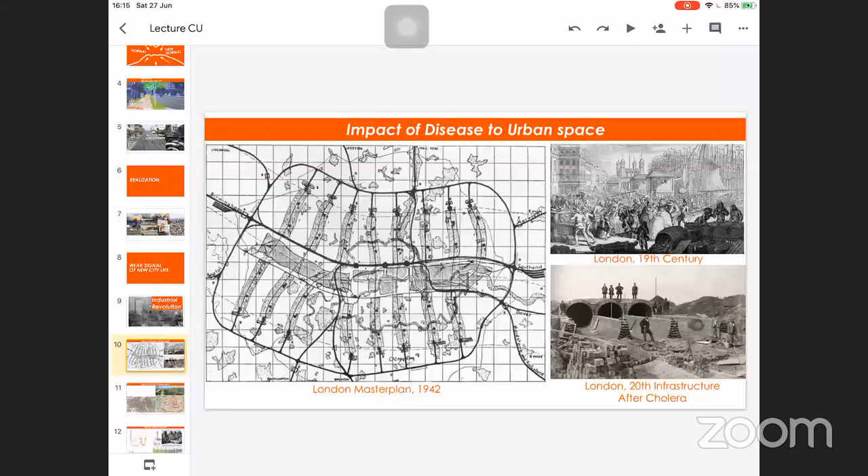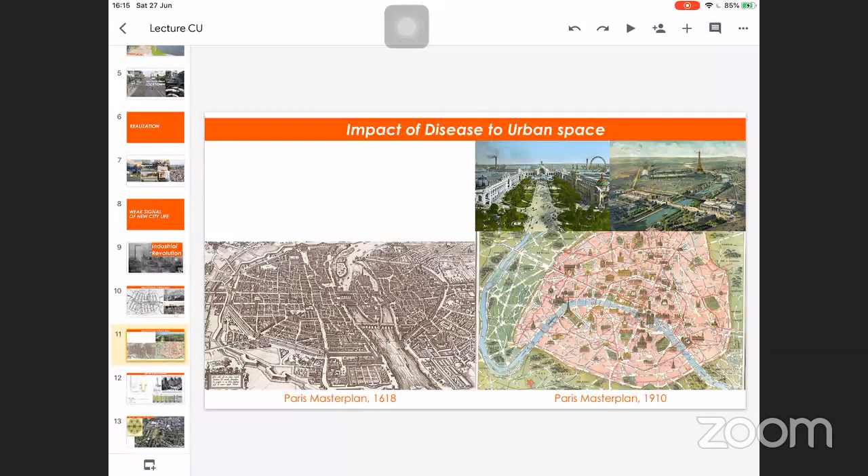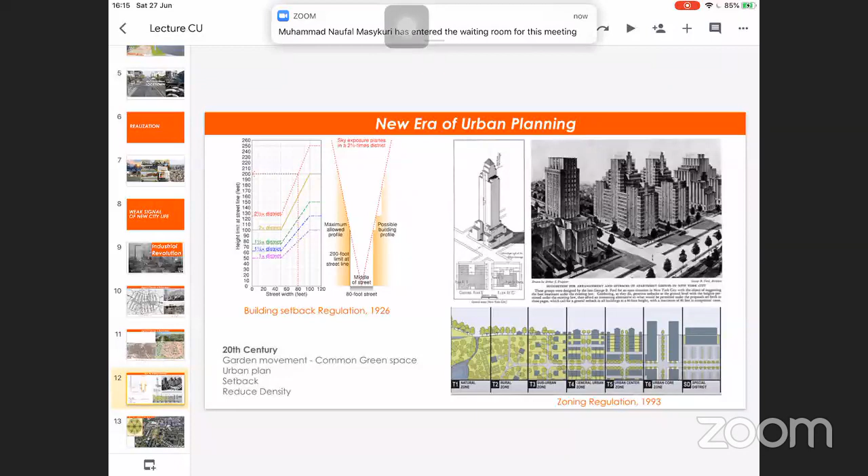So that public infrastructure became the tools to make people live better in the city. Even in France, in Paris, when the city became very condensed, they started to create parks around the city to make sure the living environment was better. Or even in the US, in New York, they started to look into setbacks to make sure ventilation got better in this kind of environment. People also started to look into the possibility of living in the garden, having this idea that they can live outside the city.

In the modern era, we started to look into the possibilities of living within the garden, or garden city, like in Singapore. So I think the relationship between the city and the well-being of the people is kind of related.

For example, right now we are facing a lot of air pollution and people getting sick from living in the urban area, and we are lacking green space. For example, we have very little green space in Bangkok, relating also to safety in the city and mental health. A lot of studies have confirmed that actually public space or green spaces can play an important role in creating better well-being for the people.

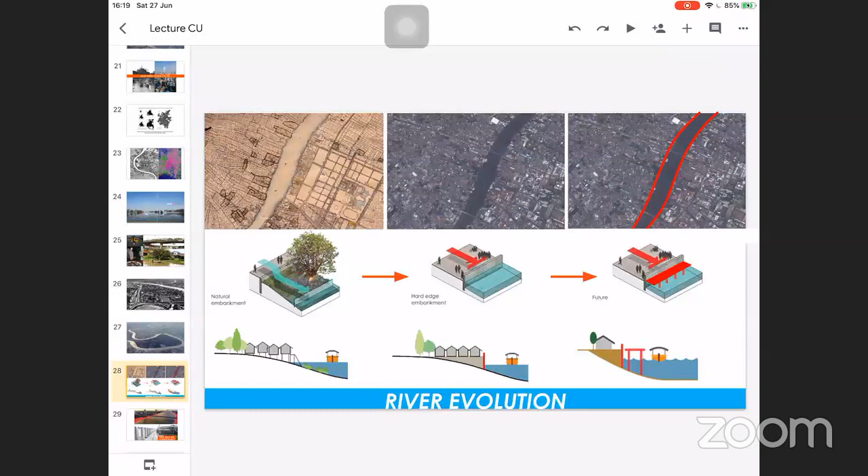If you're looking at this map, it's very clear that people started to reclaim the peripheral area or riparian area along the river. Because of the flood, the intervention was a concrete wall to prevent the flood from flooding the city. So I think the more we develop the city, the more nature will be replaced.

Of course, replacing the public space with this concrete structure might not be the real answer to that, because it affects people and affects the way of life of the community. So I think we need to look into what would be the inclusive role of public space that can think and be concerned not only for the people, but also for the natural environment at the same time.

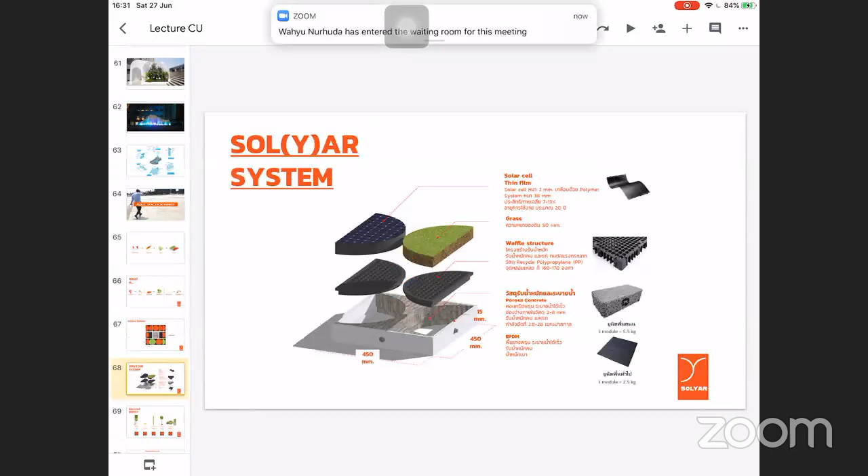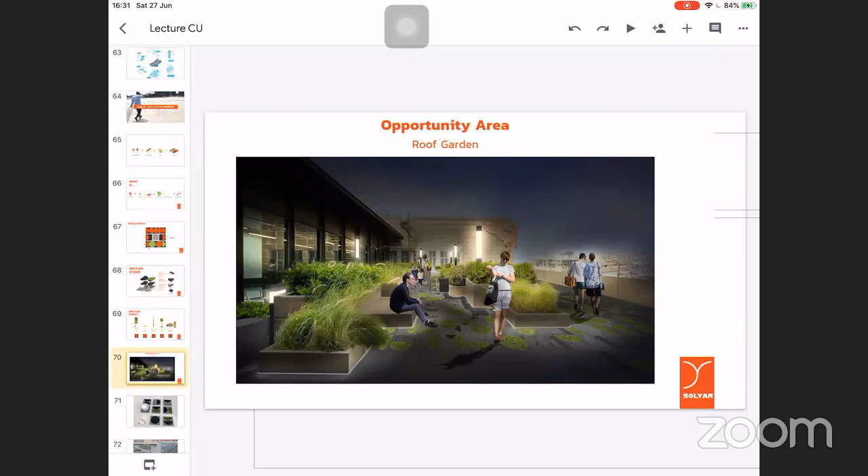So we're developing this pavement that combines solar cells and greenery, becoming a new tool to turn the heat space, or hard surface, into an energy space that can benefit people for enjoyment and also turn into energy during the night.

We got a grant from the government and we are developing the one-to-one prototype right now, and it's going to be implemented within the next two months.

Another possibility for public space is green infrastructure. I think flooding is one of the environmental challenges we face, so the role of green space or parks can also be part of the solution in absorbing the seasonal flood during the rainy season.

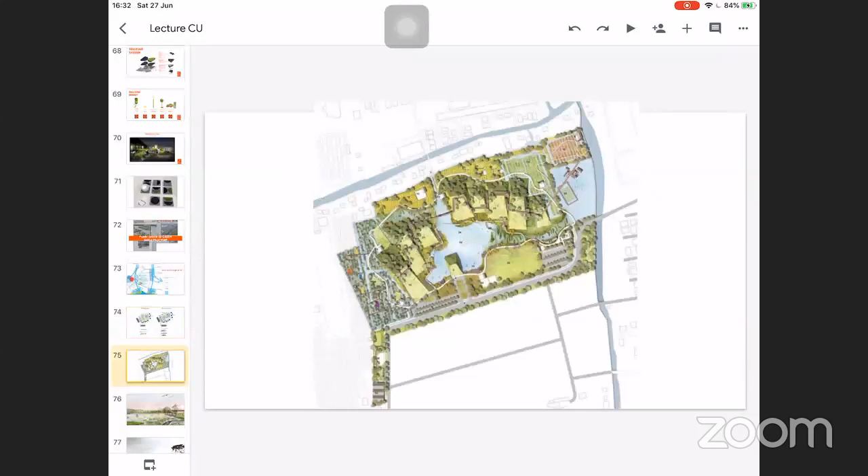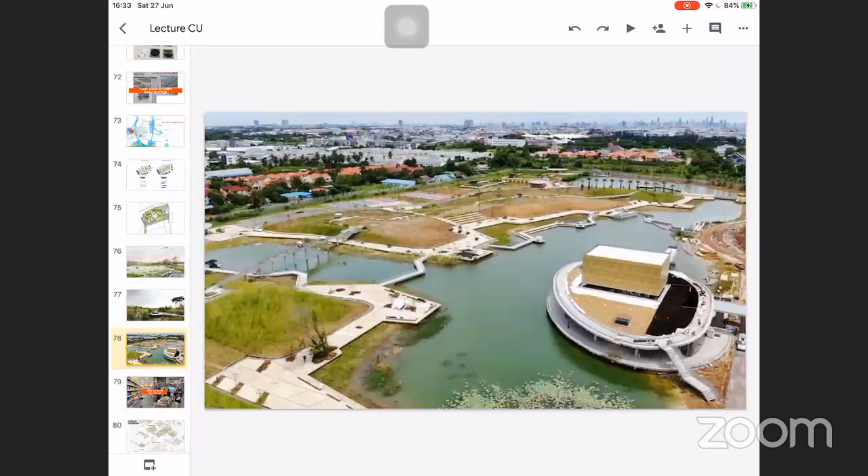So we designed this park outside Bangkok city, which can receive the flood from the north. It becomes a water detention area that can save the neighborhood from flooding, and it also turns the public land into more functional, educational, ecological park for people to enjoy at the same time. It's under construction right now, and hopefully by the end of this year it will be completed.

Another topic is about food security. I think during the pandemic, it's shown how vulnerable or fragile urban dwellers living in the city are. We have to rely on food produced from the outside, from the countryside.

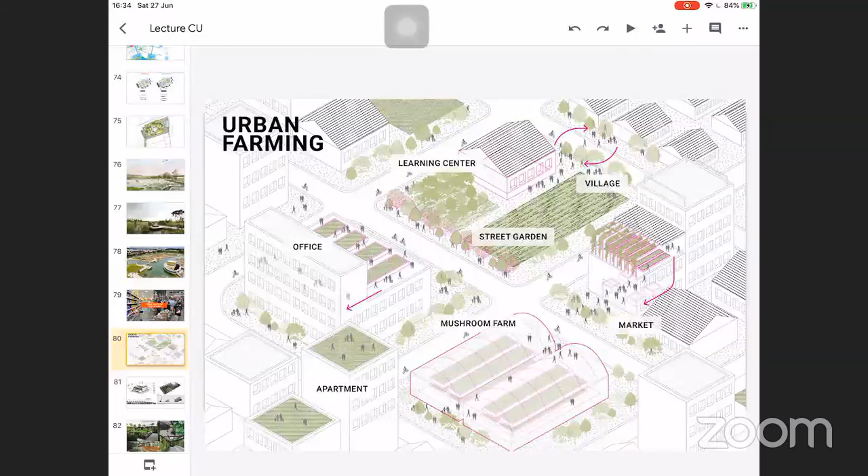I think right now people start to look into our own assets, either abandoned land in the city or rooftops, to see if they can be turned into urban farms, which can reduce this food security risk. This is one of our projects in Bangkok, turning the rooftop of an office building into urban farming.

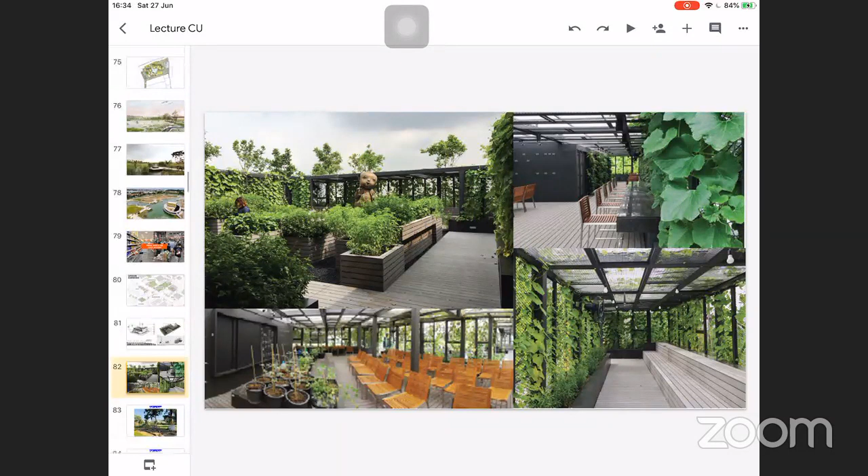It's composed of two zones. One is a workshop area, and another is for farming with benches to sit around, becoming like a roof garden that officers in the building can enjoy, while also inviting the public to come and learn how to develop their own urban farm.

During the pandemic, we've been surveying the possibilities of turning empty or abandoned parks in the city center into farms, and trying to convince the local government to turn this abandoned land into urban farming.

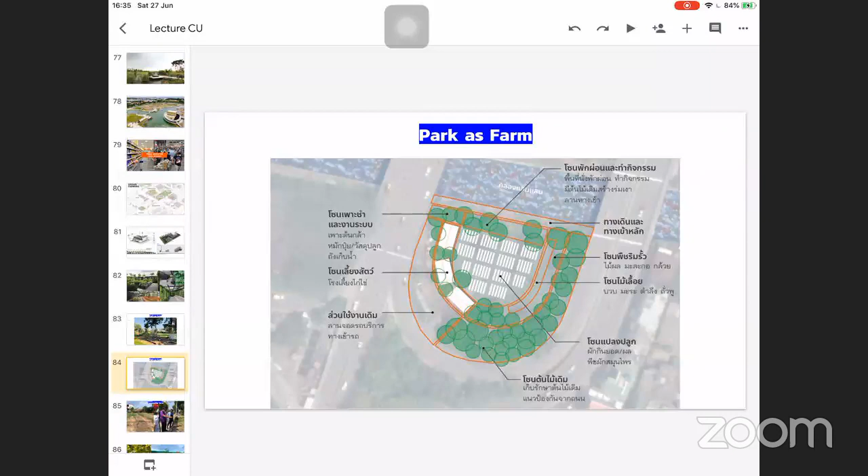I think before, we might have thought the park's role was just to provide activities for people. But during the pandemic, people started to rethink what the new role of the public park should be.

Not only in the park, but in the community too - this low-income community in the city center - we discovered the community themselves turned abandoned land into an urban farm where they could produce vegetables and herbs to feed community members.

Some communities turned a very limited space into a vegetable garden, or sometimes a mushroom farm, which not only feeds the community but also becomes a new product that creates job opportunities for them.

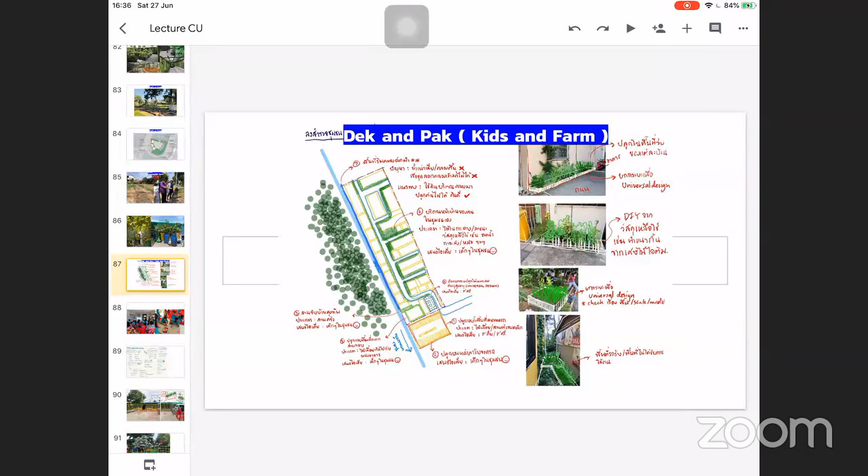After surveying, we discovered one community we would like to work with, because it still has potential for farming even with so little space. The community themselves tried to find areas, and we've been working with them for the past three weeks identifying spaces that could be turned into farms.

We worked with the kids in the community to identify what kind of vegetables they wanted to plant and how they would turn those plants into food. It's a learning process with the community and our staff, and we just finished the design - hopefully we'll implement it with them in the next couple of weeks.

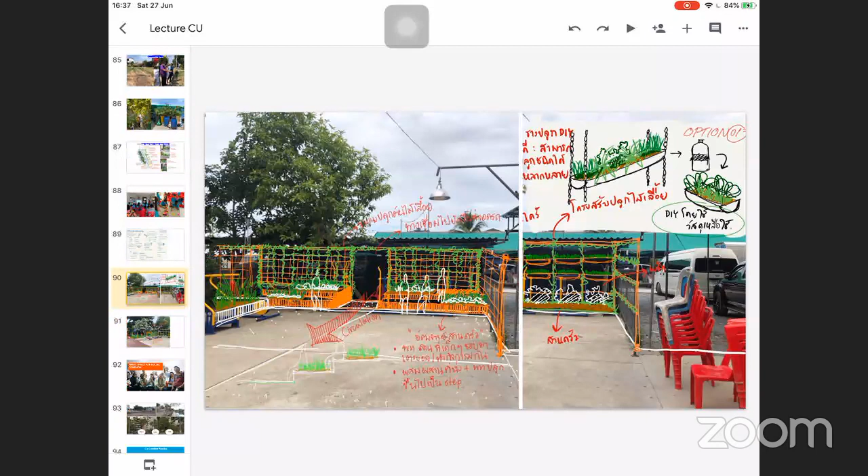So I think the role of public space can answer the ongoing challenges we face, and it can also become a tool for bringing people together to have a dialogue they never had before.

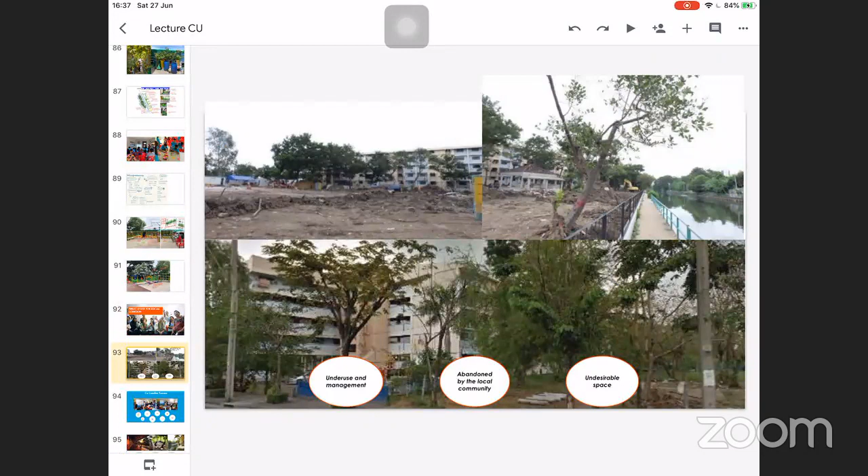This is one project in Bangkok, next to a housing project. It used to be abandoned land, and we had a dialogue with residents asking what they would like to see and what kind of program they would like in turning this abandoned land into a community park.

With that kind of process, getting people involved from the beginning, we were able to find the specific program - the way they use it, what time they want to use it, and what kind of program they want to have.

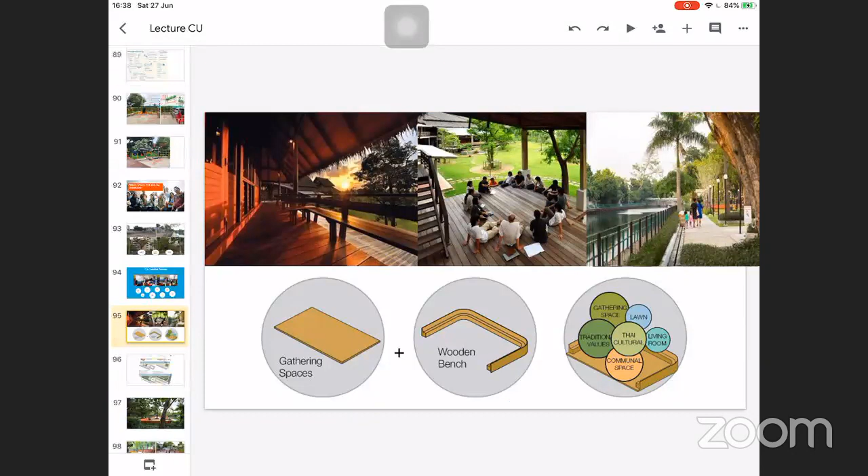We turned that program into terrace spaces in the garden. Each terrace has its own activity, ranging from community activities for kids, for older people, and for families.

Normally a park designed by the government might not have this kind of design or idea, but we try to make sure the public realm can have a very nice and inspiring environment for people. I think the idea should always come not only from the designer, but from the people.

Once we have the tools, once we have the dialogue, a lot of interesting ideas come out, and we are the ones who translate those ideas into reality. But the beauty of this process is not about the design, it's about the sense of belonging. This auntie said she's very glad and proud to see this community completed.

I think this is a very meaningful word for us to learn, because I think she feels that her comments and her opinion has been respected and realized. I think nowadays she's become one of the committee in taking care of the park with the district officer and with the community. So I think the process itself can turn people into citizens with a sense of belonging, not only to the park, but also to our city at the same time.

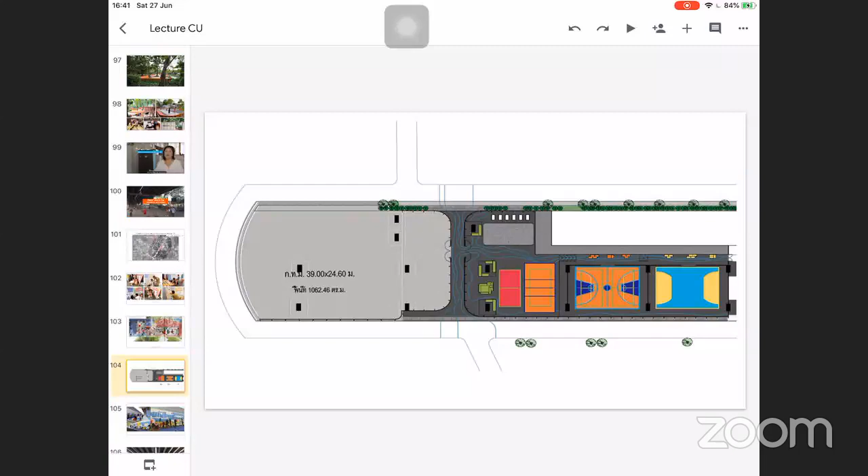The beauty of this process is about getting people involved, not by asking their opinion, but by asking for their action in doing something. Sometimes we ask them to give a helping hand in planting trees, or this time we ask them to render or paint the mural wall that reflects the building and the story of the community.

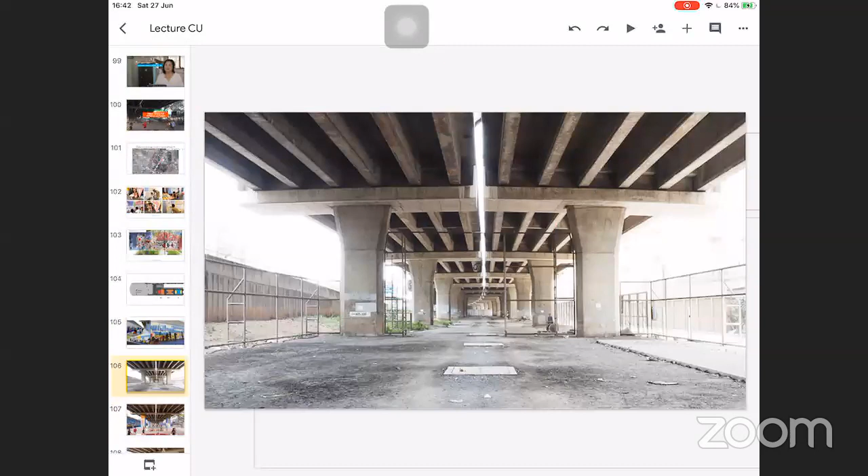So from this abandoned and not lively space, it turned into quite a lively space nowadays using the color and painting they chose, the way we programmed it, and organizing the space with proper seating, proper netting, and rooms for many possible activities in the future, like music, or even a party space or movie space, I hope in the future.

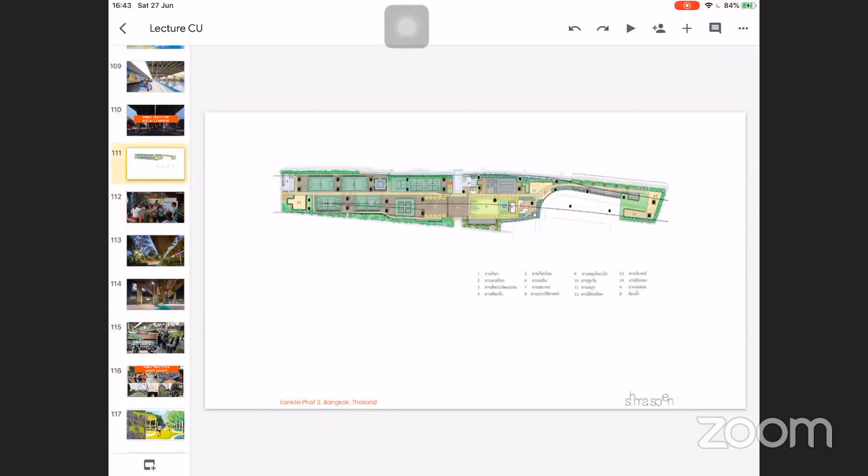This is a similar project in the city center, turning abandoned space underneath the expressway into a community garden. Of course, one of the challenges we face in the city center is about safety, and we organized this program with our alliance to ask people to help.

We asked them to survey unsafe areas in the city using an application to pin down areas they think have potential to create crime and become unsafe for kids, women, and everyone.

So I think the role of people nowadays has enormous interest in making the city better. I think it's about providing the tools, providing the dialogue, and providing the activity. And I think we can get a lot of opinion and data by getting people involved.

And from that data, we also submit this information to the authorities to make certain actions on how to make the unsafe space become better, or a safe area.

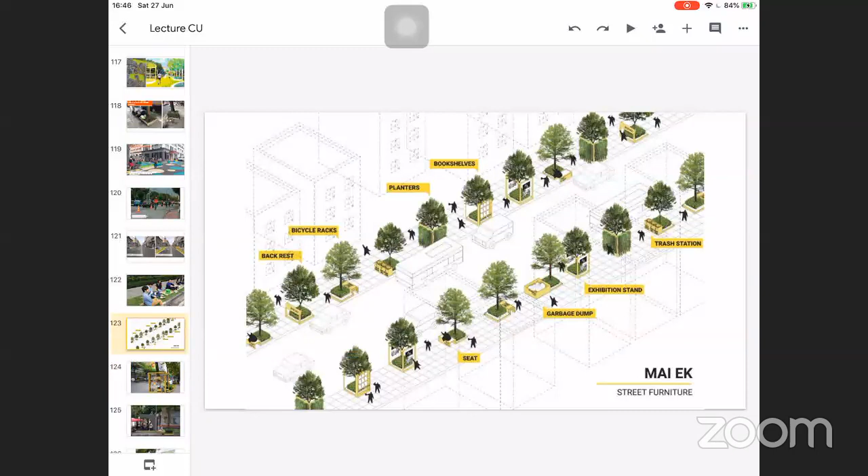Can we turn the footpath into the people and planting space? We developed that idea further for this year's Design Week, which finished a few months ago, by combining this idea of various activity with the street tree. So it becomes elements that encourage people to enjoy sitting, reading a book, or parking their bicycle, or become a place for people that turns everyday elements into something special. We hope that it can stay and become the prototype in developing this kind of public realm or footpath for the people in the future.

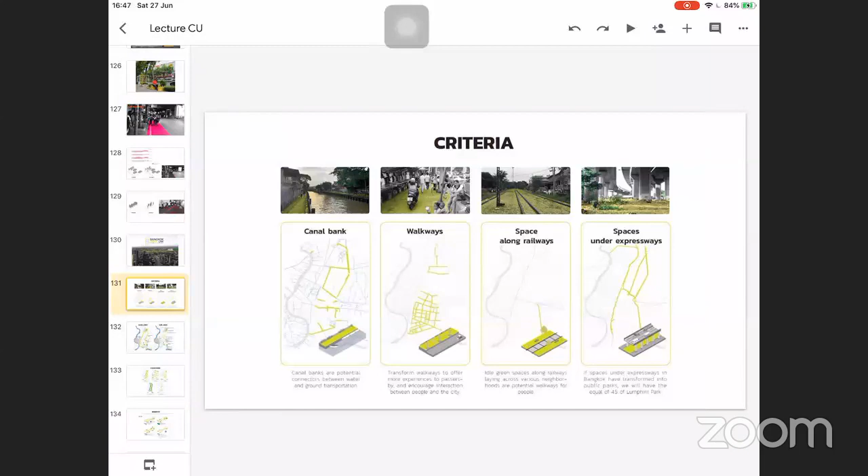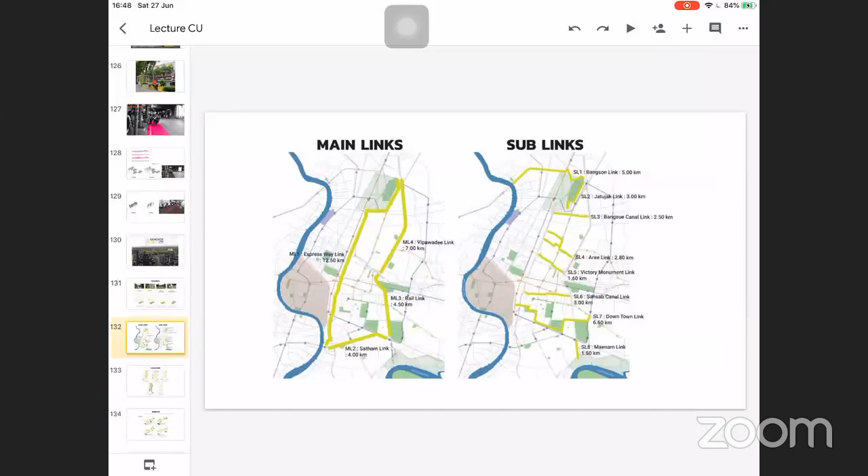We have seen many possibilities in turning the gray infrastructure that the city has a lot of, and connecting them to create a green link or pedestrian link. These elements are the canal banks, abandoned canal banks and walkways, space along the railways, and also space underneath the expressway. This is a city center area that we found has a lot of potential, because this link will be able to connect various districts scattered around the city center, and also connect to the existing park that's currently quite difficult to enter by bicycle or on foot, and also link the transportation nodes in various areas.

So those are the studies and the impact we think it can have, turning this into walkways that can generate a decaying community into a lively one for the people.

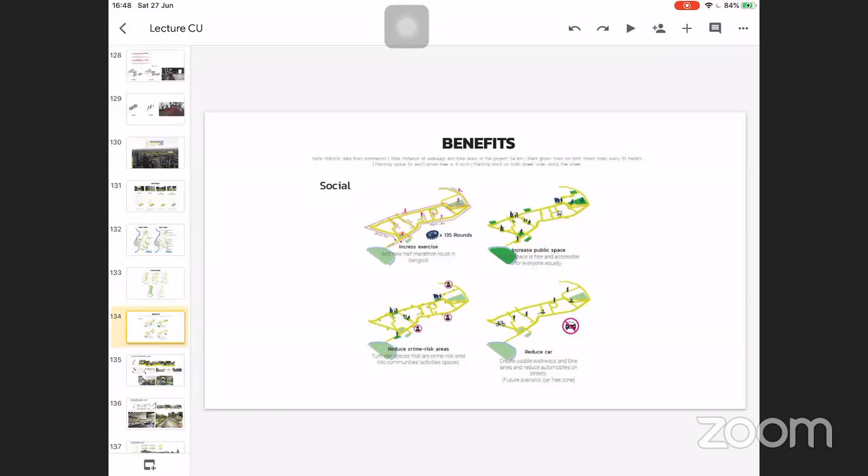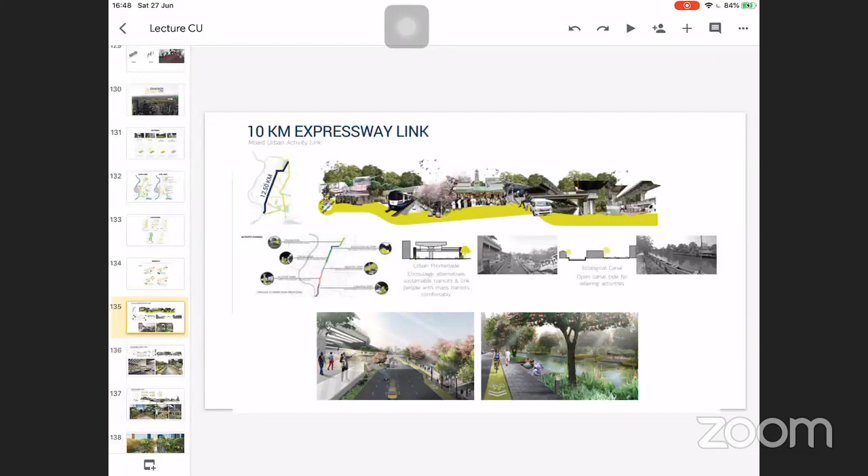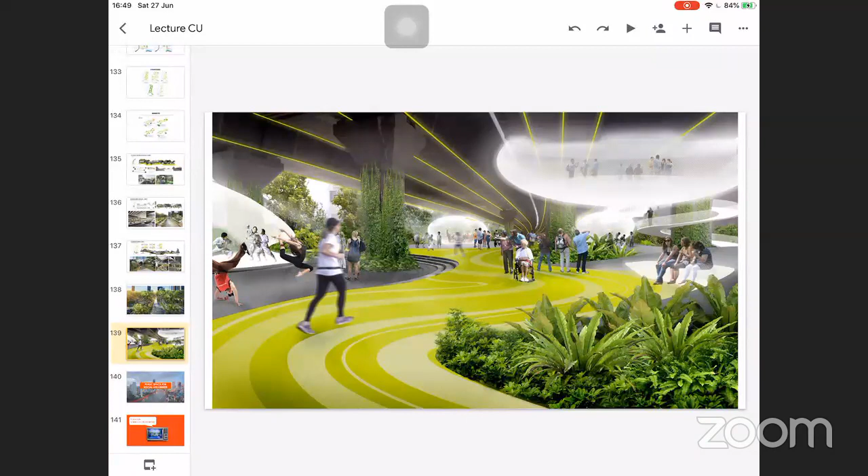This is one of the links that will connect a transportation node in one of the major areas in the city center, and actually can go along the canal, connecting to different district areas. Some of it can go through shopping centers, turning some of the decaying canal into a lively one, and sometimes go through the area underneath the expressway, turning it into a linear park.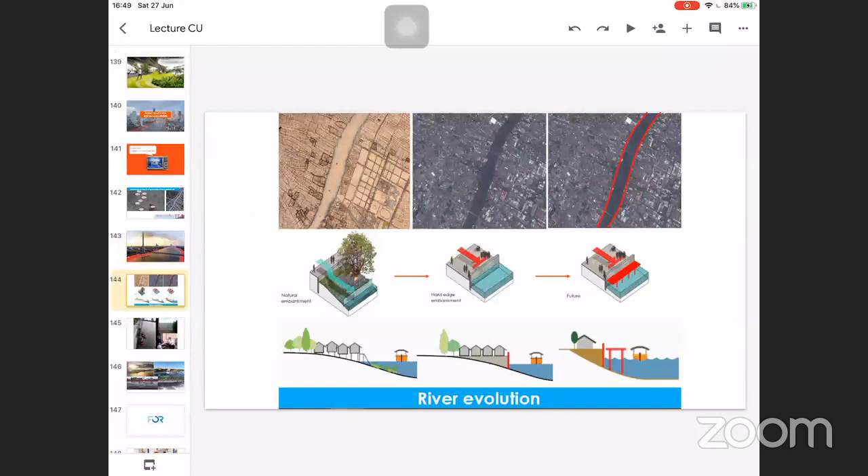I would like to talk a little bit about the river. This is one of the movements I've been working with for the past 5 years. Five years ago, when the government announced this project for a promenade to be constructed along the Chao Phraya River, we thought this was not the right project because it would create a lot of impact on the river community. So we formed a group called Friends of the River. Our activity is about connecting people, collecting ideas, and voicing this opinion to the government. The idea in developing the river and creating public space at the same time is not about creating a promenade, but about creating a network of green space, turning abandoned land in the community into parks, and making sure it becomes a network of public realm.

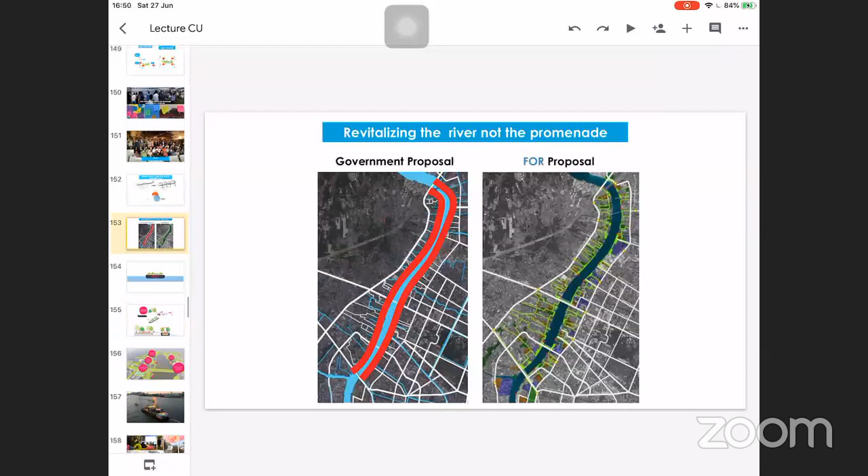We also have another idea of turning a boat or barge into a floating park. This park can become a prototype showing the possibility that public space doesn't have to be on the ground, it can be on the water as well, turning it into a lively space for many activities.

Recently, we are looking not only into creating the actual project or design, but creating a platform. By working with the private sector and the government sector, we have seen certain loopholes and also certain possibilities in connecting and combining resources to turn them into parks. So we developed this platform called we!park. we!park is a platform for creating parks for the city.

I think everyone is aware of this threat in living in the city - the more we live in the city like we do nowadays, with a lot of pollution and lack of green space, the worse our well-being becomes, making us even sick in the near future. This data shows that we are really lacking green space in the city, and we really want to improve that quantity from 6.9 square meters per person to 10 square meters per person.

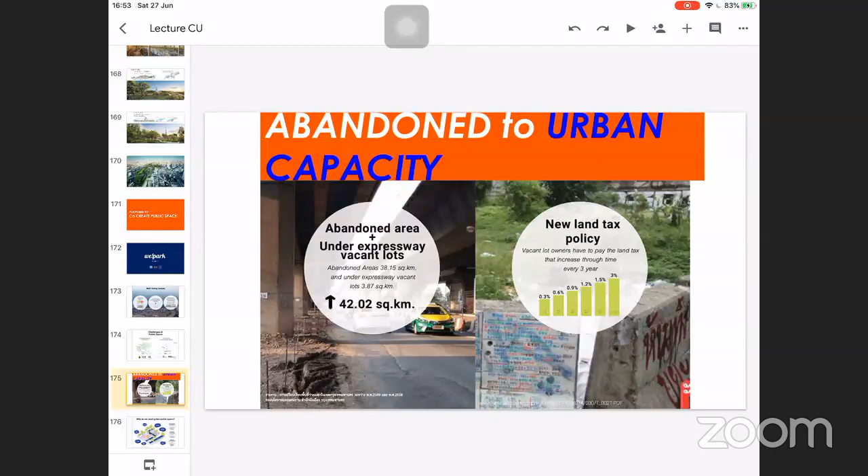That possibility has potential because right now we have a lot of abandoned land left in the city center. Some belongs to the government, some to the private sector. The government is going to impose a land tax policy in the near future, so the private and public sectors need to turn abandoned land into something that can benefit the city. Turning abandoned land has a lot of potential to create good impact on the well-being of people, the economy, and society.

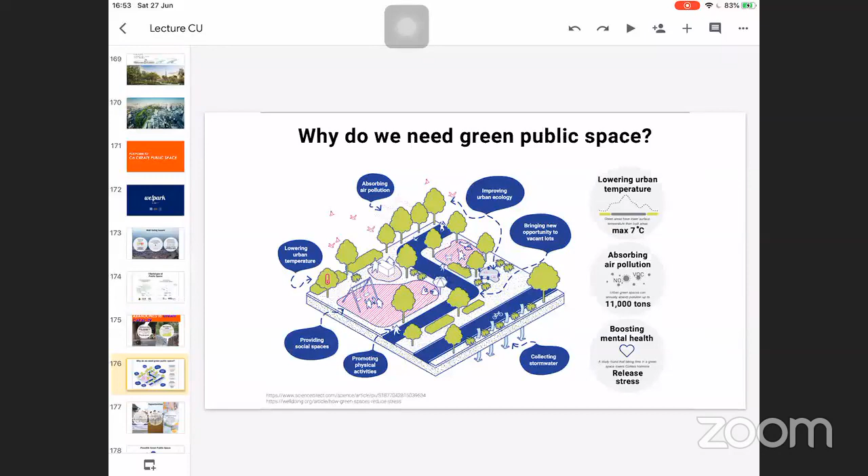we!park itself is a platform for finding abandoned land and turning it into pocket parks. We work with many stakeholders from the social sector to the private and government sectors. If the private or government sector has land, we get professionals involved to create a design with the communities, and with the help of the academic sector we ask students to be part of the process, because it's not only about building physical green space, but also creating community and a new generation who really care about green space and the city.

This is one of the pilot projects at the moment. One of the ladies, a Bangkokian, donated this land to the city, and we asked the government to go through the we!park process in finding partners, doing surveys, creating workshops, and getting the public involved. We would also like to do crowdfunding at the end of the process. This is the process we've been working on for the past 4 to 5 months.

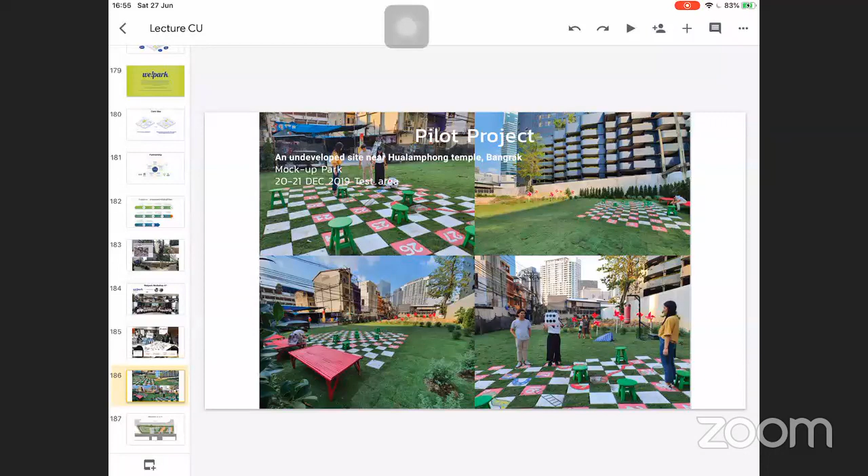We did mock-ups to let people have ideas before implementation. This mock-up is about testing and prototyping to get people's feedback so the park can be improved. This is the final design, which we recently submitted to the government, and we're going to do the crowdfunding by the end of this year, hopefully completed by the middle of next year.

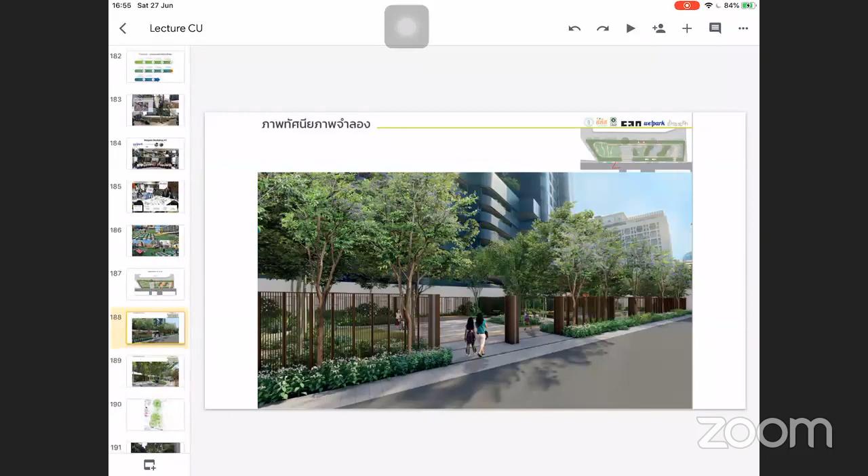The platform also organizes activities asking people to become like green fighters or surveyors in finding abandoned land still present in the city. Through that dialogue and activity, we have seen a lot of interesting ideas and potential that we never found in our neighborhood before.

After those activities, we also do some sketches and discussion, and we really want to make sure this idea will be implemented with the government in the future. Nowadays this platform is starting to grow, and we are getting more interest from the private sector to submit land to be developed into pocket parks. Hopefully this platform can not only create parks, but also create awareness, provide better data, and propose better policy to the government—that creating parks shouldn't be top down, but a co-creating process.

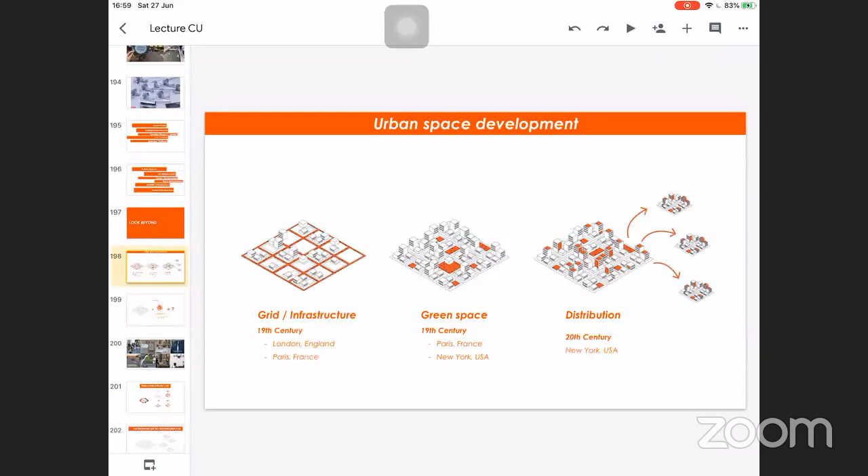If we look beyond some of the reflection of the impact that the pandemic has created, I think we talk about the urban space in the past that being created after the pandemic, or sometime after the certain circumstance. We having this infrastructure of the road out of the pandemic in London. We having the green space after the urban industrial revolution, and in Paris we want to create a better living environment, or we have the idea of living outside the city center. I think we would like to explore the new possibilities. What would be the future scenario in living in the city?

I think one of the possibilities is not all about overlapping cities. So we might have different times in using the city in order to reduce the crowded area, in order to prevent the spread of the pandemic. So I think working from home is showing the possibility that we can do that.

Another idea is that we're seeing the potential or possibilities in empowering and creating the micro neighborhood. For example, myself living in a small neighborhood during the lockdown, we found that it can be done if we can equip it with more facilities, from food facilities to recreation facilities. So people don't have to travel around the city and create a lot of pollution. The time we spend in traffic will be reduced, and we can spend around 15 minutes in our neighborhood to do all kinds of things, from working, shopping, recreating, and doing production as well. So I think the 15 minute city or micro neighborhood has been in our discussion for a while in many cities around the world.

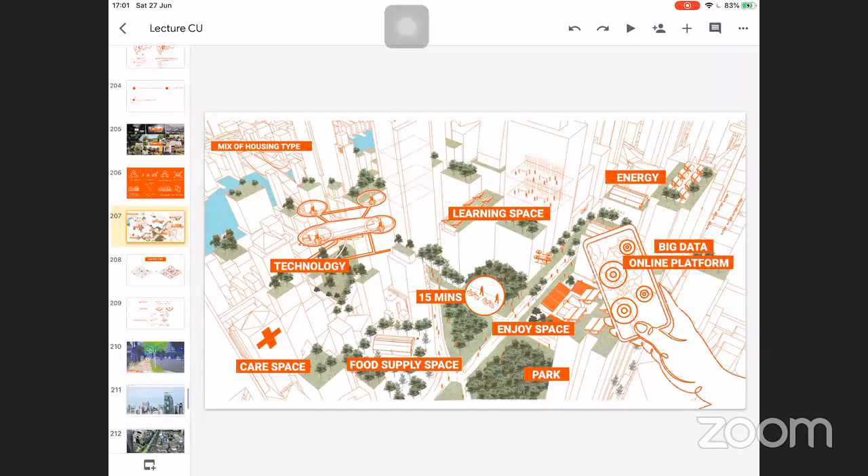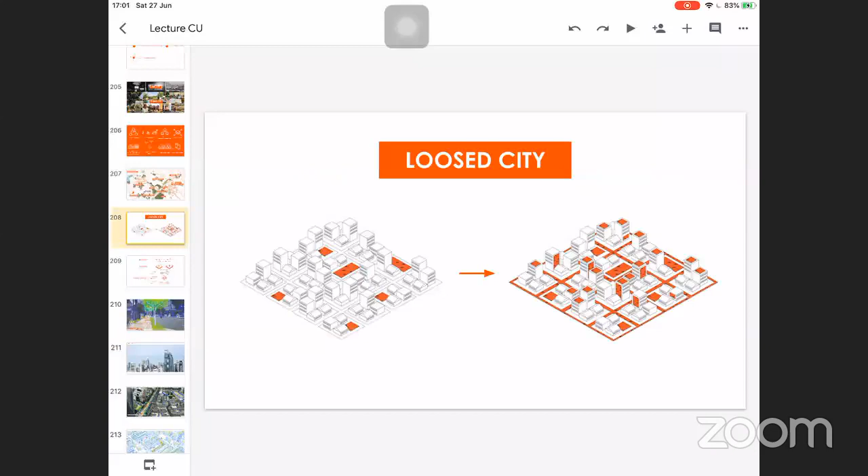Another possibility is, what if we can turn the abandoned land in the city and make sure that there is a certain room, not only for the car, but for the people, because we need to allow a better environment to make sure that we'll be able to stay healthy and stay in a good environment in the future. So I think turning the road into a bicycle lane and turning the road into a wider pedestrian path is one of the key priorities. And abandoned land in the city has a potential in serving the infrastructure that I mentioned earlier that we are lacking at the moment. So we need to start to invest in creating that infrastructure for the future.

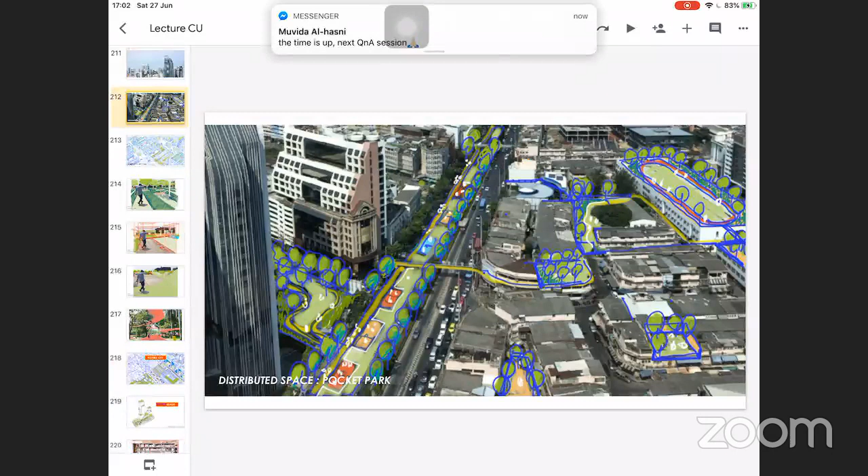And of course, flexible city is one of the ideas — during the pandemic, we can see that the park has potential in turning into urban farming to serve the community, or the road can be closed and turned into a bicycle lane, or the rooftop can turn into space for producing energy. So during the pandemic and not during the pandemic, we can see that the assets we have in the city need to be utilized in order to make our survival and make sure that our activity in the city will continue in the future.

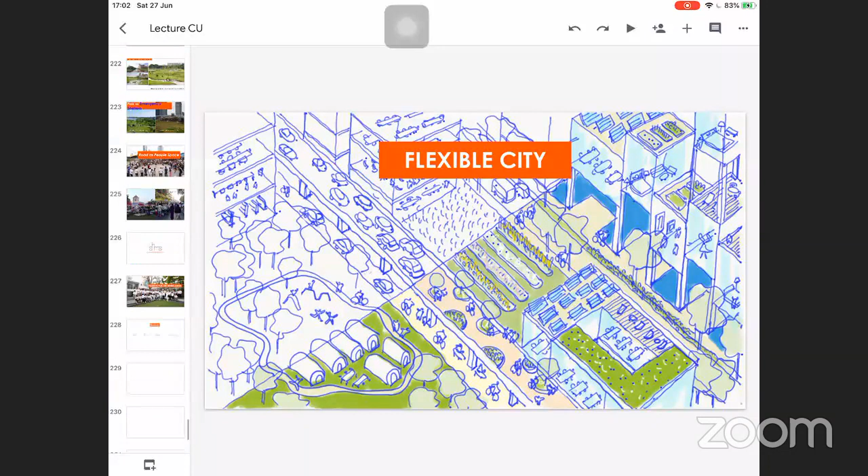So those are our ideas, and I think the topic is about creating space for the people and nature at the same time. This is what we've been working with many stakeholders on for the past 10 years, and we are also exploring new possibilities for the future. Thank you for having me, and if you have any questions, I would like to have a discussion after this.

Thank you, Yossapon, for the presentation. It was really nice to see a lot of approaches and problem solving on architectural landscape.

Let me, sorry, should I stop showing the screen? Please, so we can see your face. Yep.

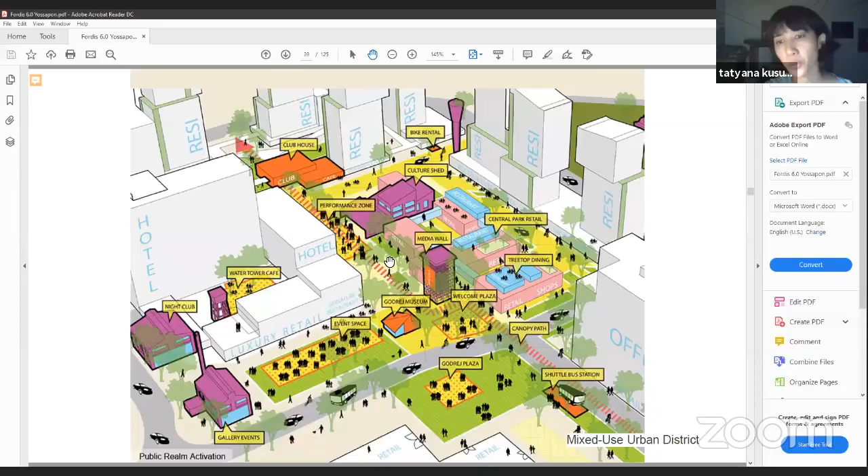So I would like to. Is there any questions? Let me see for a moment. Okay, while we are waiting for questions, I would like to ask...

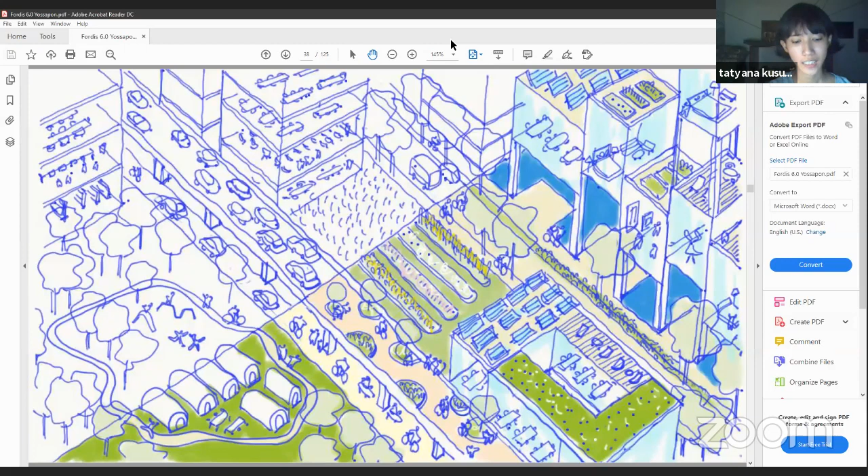What is the role of landscape architect in this pandemic era? I saw a lot of approaches, but most of them happen during the normal — what we call normal. But if we talk about urbanscape or public space and everything else, it is very communal, and we've been told to stay at home most of the time to isolate ourselves. So what is your role as a landscape architect to deal with that?

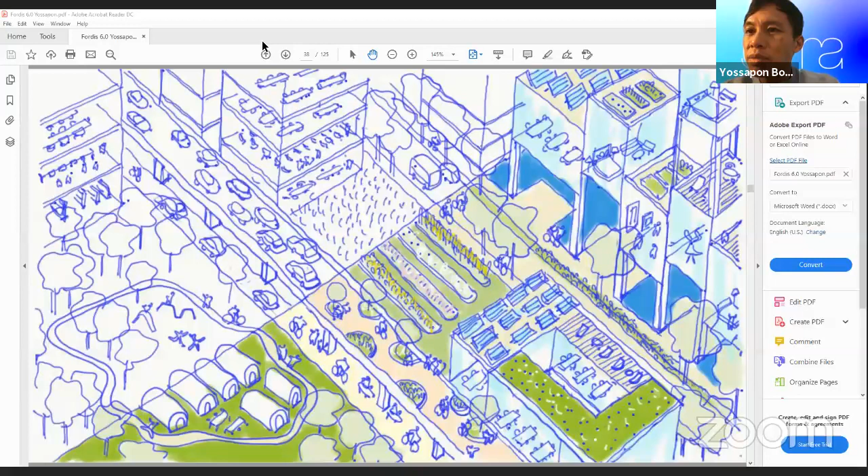I think our role as a landscape architect has always been about providing solutions for the people, and finding a way to keep a certain balance between the people's requirements and also nature's requirements. And I think the pandemic itself has shown another consequence that has resulted from developing the city or developing urbanization without having nature as part of the conversation. During the pandemic, when people started to lock down, I think people started to think about nature, space, and parks more than any time before.

I think we can experience that the earth is cleaner without the people. So I think if we're gonna reduce the future disruption, that means we need to redesign and rethink the way we design the city or the urban, or the way we design the physical space.

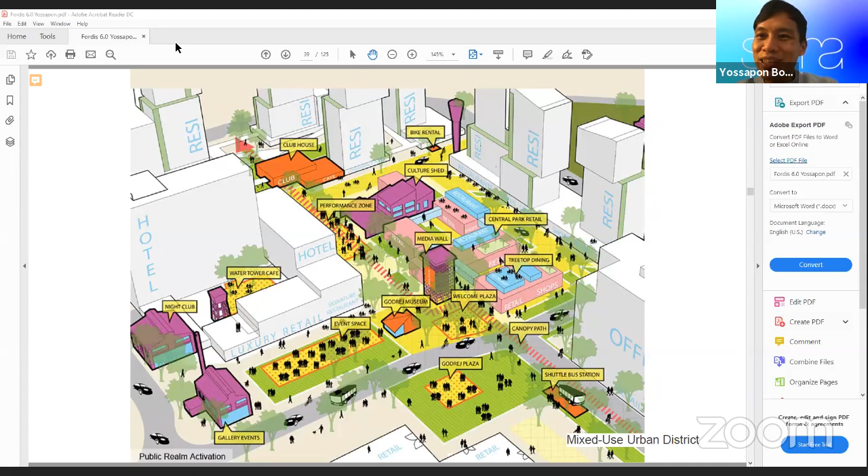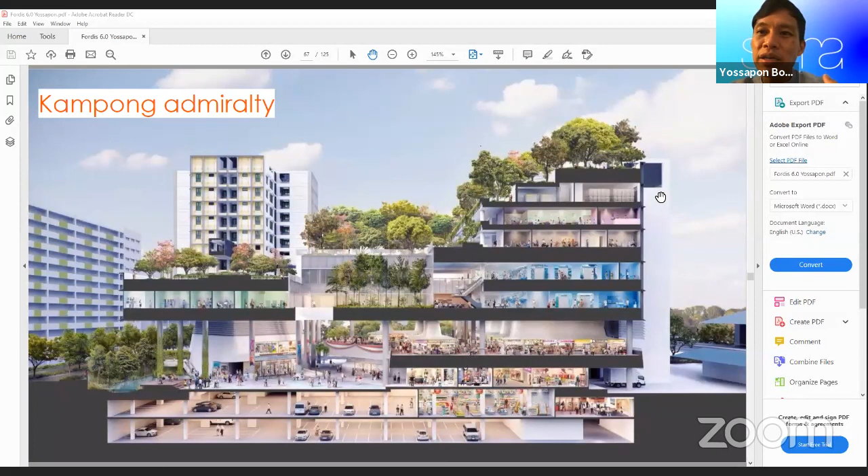So I think the role of the landscape architect now, I think we need to look into how we're going to turn the asset, like I showed you in the lecture or the slide, that actually we have a lot of assets, like abandoned land and empty space underneath the expressway or everywhere. So what if we turn that asset to be the mediums or the tools to make sure that people can live with the challenge, or live with the pandemic, or live with the climate change.

I think that is our role, because, for example, we need to still be able to continue doing many activities in the city. The park can be the tool if we design it properly. It can provide space for the water, and also for the people at the same time. It can mitigate this natural disaster.

So I think we would like to see more of the public realm that can encourage people to use bicycles, or have more social distance in the public space. And I think people start to think about how we're gonna do more activity in the outdoor area rather than crowded in the indoor environment. I think if we can look into the asset that we have closely, we will be able to find the answer.